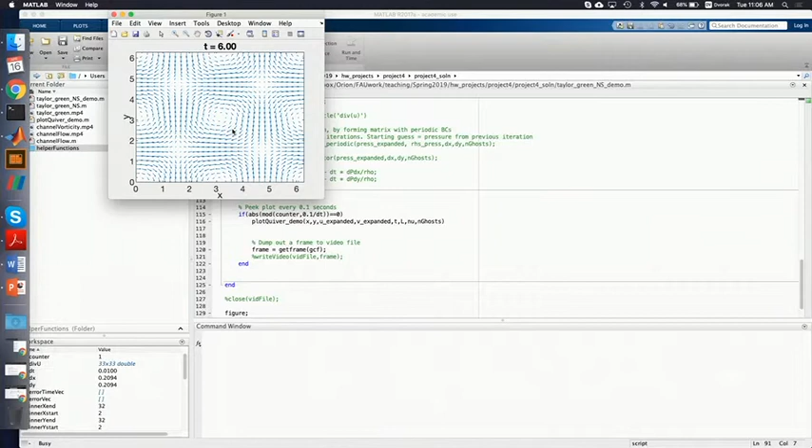Second check is you do only diffusion. So you run the whole code doing only diffusion, no pressure projection, no advection. So yeah, advection commented out, pressure projection commented out. And then what will happen is your velocity vectors will just decay, right? The third check is with this diffusion only simulation, your divergence should stay 0 for all the time steps. Okay.

Now, when we start doing advection also, this statement will no longer be true. So now the divergence of u will not be 0 anymore. So let's see when we plot this. All right, so now div u is no longer 1e minus 15. Okay, and we expect that because the advection term introduces this non-zero divergence.

And the pressure projection is what will correct it. Oh, by the way, let's see what happens to the velocity vector if we let it run without the pressure correction. This is another simple test. So let's see. All right, the velocity field gets messed up, does not look like a Taylor Green vortex anymore. Okay, let's bring back the pressure correction.

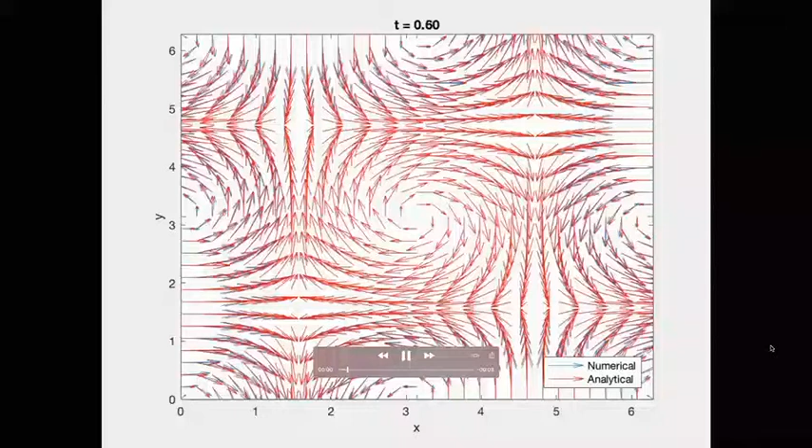And now the code will be much slower because we have to solve the Poisson's equation. All right, and there. So it's much slower, but it retains its Taylor Green vortex characteristic. And again, it will decay, and you have the analytical solution to compare to whether your solution is correct or not. And the full solution actually looks like this. So here I'm comparing numerical answer to the analytical answer. And you can see some difference, but overall, very good match. Okay, so those are the steps you can follow to check each part of your code.

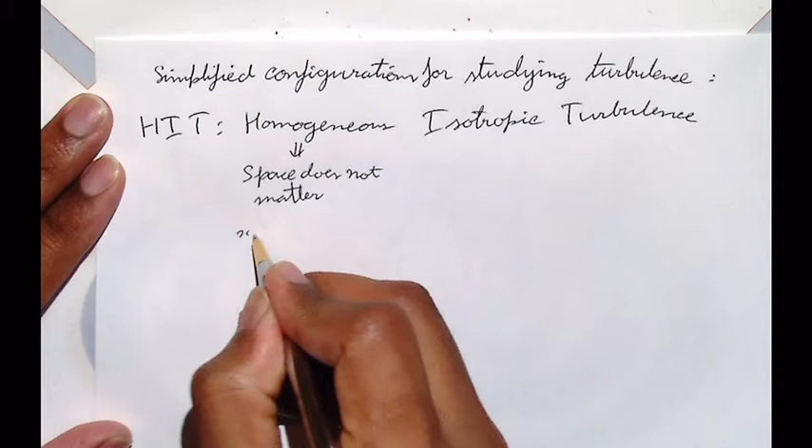So this means space does not matter - if we go from x1 to x2, the statistics will not change, right? Isotropic means direction does not matter, which means whether we look at statistics in x, y, or z, we expect them to be the same. So everything is radially symmetric. So this is the simplest configuration, and we have a 3D periodic box of turbulence.

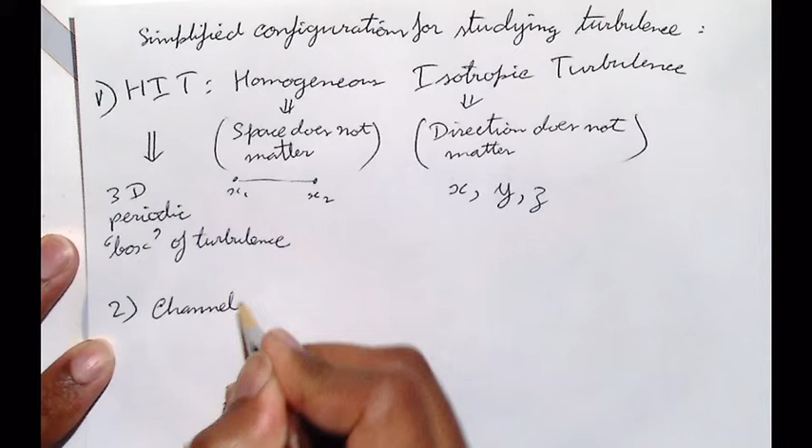Okay, and this is the simplest one. All right, the next level of complexity is the channel flow, which is what I was showing you - the flat plate with flow over it. The advantage of this is you have two walls, and the walls are responsible for creating the turbulence. So this gives you a physical mechanism for creating turbulence. So the advantage is a physical mechanism, which is the wall, generating turbulence.

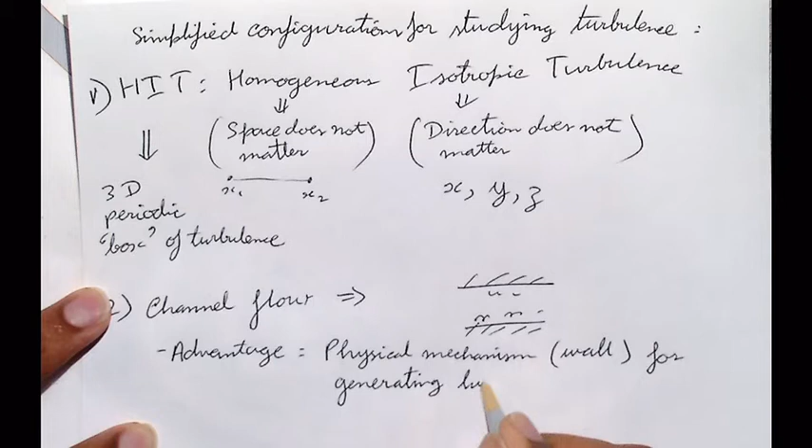What's the disadvantage? Disadvantage compared to the periodic box case - can you think of any disadvantages?

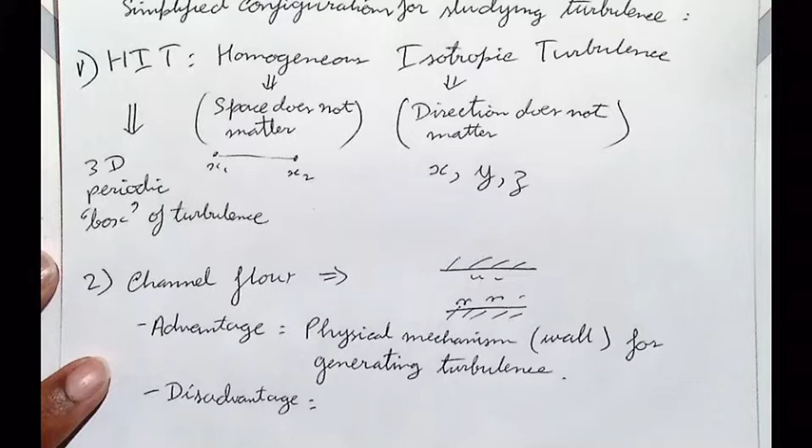Think computationally, think coding. A 3D periodic box is very, very simple to code, right? There's no boundary conditions, nothing complicated going on.

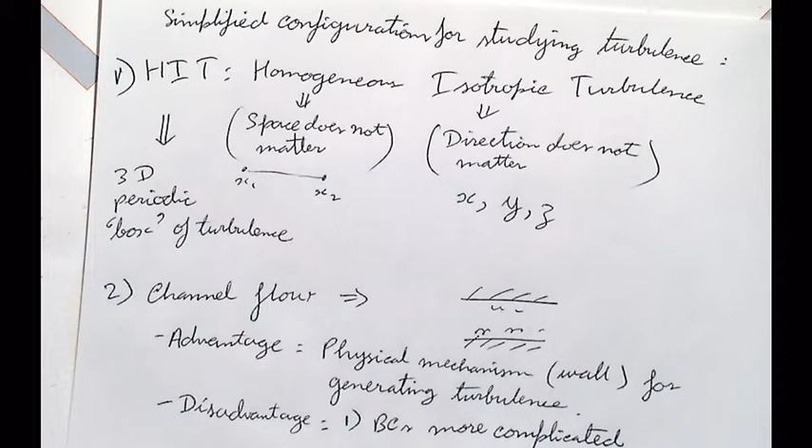With this, now you have to take care of what happens at the walls. So boundary conditions are more complicated. And another disadvantage is the small scales close to the wall are very important, so you have to resolve these small scales. In the 3D periodic box, you don't care, there's no wall where you have to put down more grid points. So this can be computationally more expensive.

This is called, in the channel flow, temporally developing turbulence. Which means that you might start with an initial nice laminar flow, and slowly it will get turbulent.

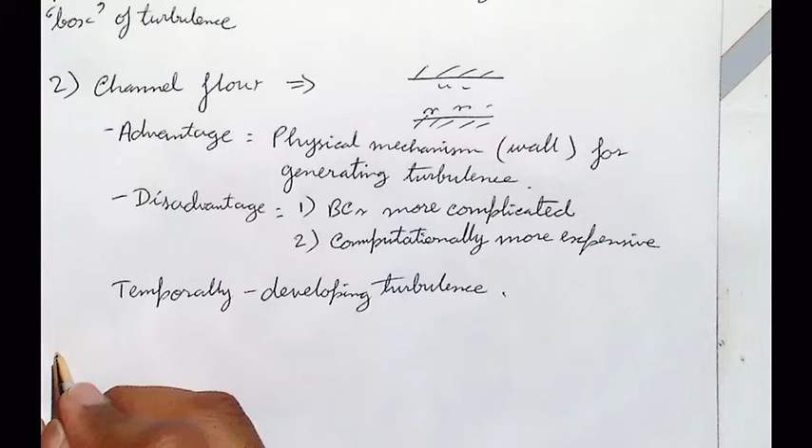Another configuration is the boundary layer flow. In the channel we have two walls, and in between there's flow. With the boundary layer we have a single wall, and there's flow over it. Slowly the boundary layer will develop and become turbulent.

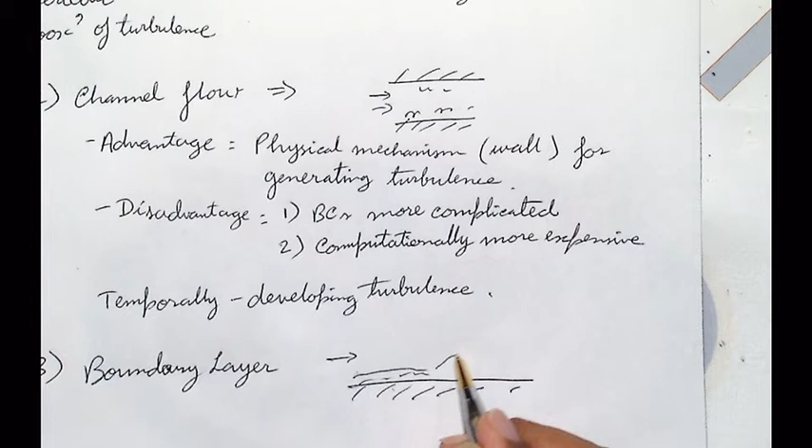And this is spatially developing turbulence. That's because in our simulation we just have the wall and the incoming flow is uniform, or you might impose some turbulent conditions. And slowly, as we go along X, we see the boundary layer becomes turbulent.

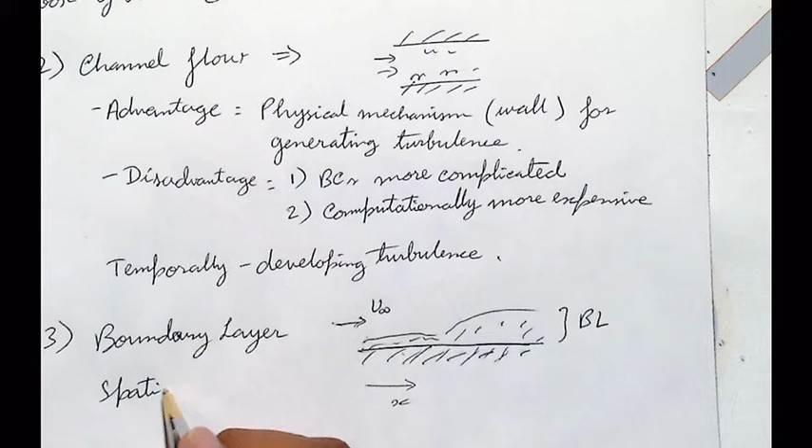And the advantage is, this is the closest configuration to real external flows, right? So this is the internal flow inside a pipe, for instance, an air conditioning duct. And this is what you would get when you're looking at flow over a car.

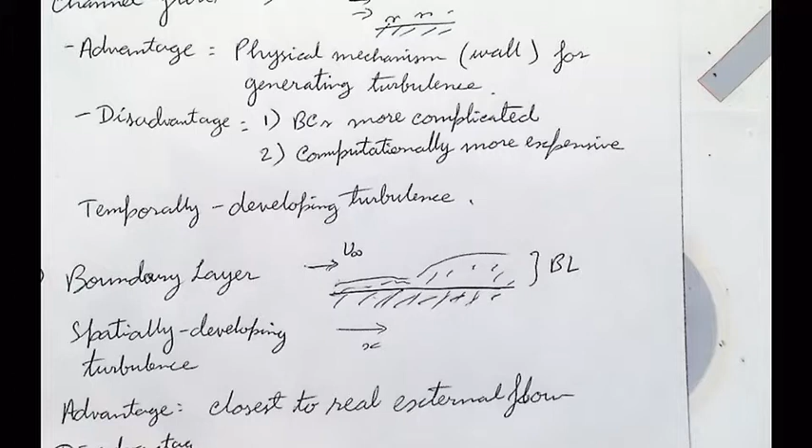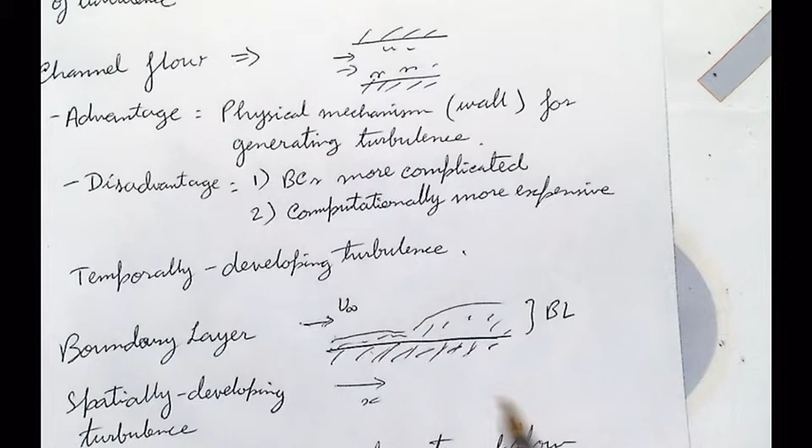And the disadvantage, what is the disadvantage? Think about it, okay, here we have periodic flow, whatever goes out comes back in, so I can technically have a small domain. What happens here? There's no coming back, right? So if you want to look at a large Reynolds number, Re_x, you have to have a very long domain. Make sense? So this configuration tends to be the most expensive.

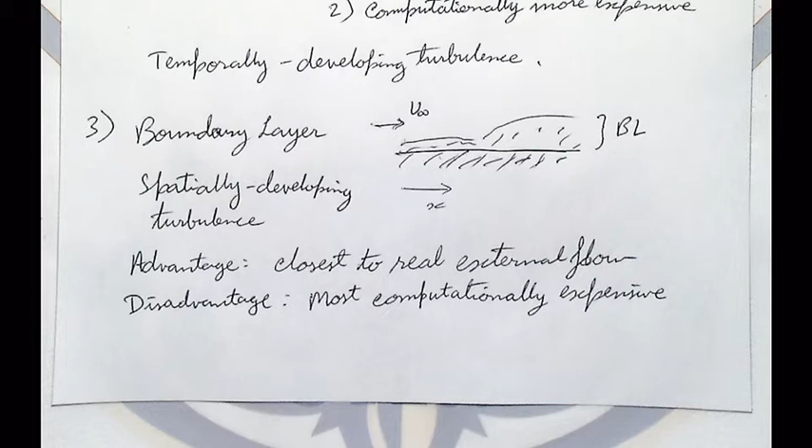So these are three major turbulent flow configurations that people use to study what's happening at the very small scales, in simulations at least, and in experiments. And the goal is to try and understand what's happening physically, so you can postulate models that might work.

Models. What do these models do? Let's think about that for a second. Do you remember what is the problem in turbulence? Why can we not simulate high Reynolds numbers?

If I say simulate something at Reynolds number 1 million, what would you say? I would say I need a turbulence model. Why do you need a turbulence model? Because it was chaotic, so the source of that fluctuation cannot be predicted at high Reynolds number.

It cannot be predicted, but it can be simulated, right? Yes, we are solving the conservation laws exactly. We are simulating them. So technically, you could just simulate it. Let's solve it numerically. That's what I'm asking.

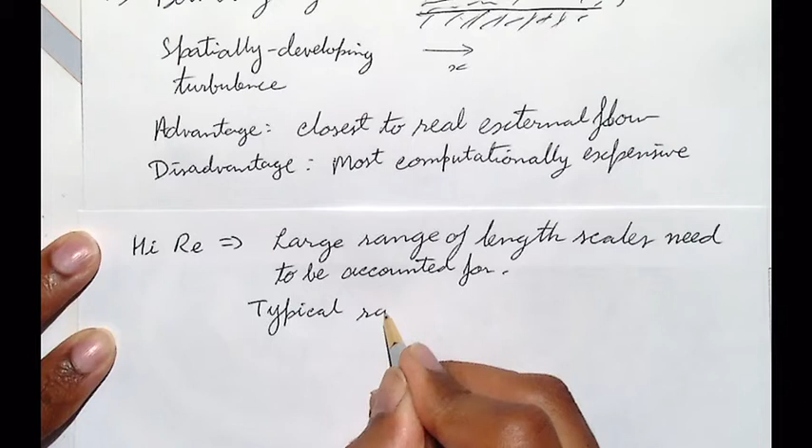These need to be accounted for. The typical range can be from 10 to the 6 to 10 to the 8, in a moderate Reynolds number. What does this mean, 10 to the 6? It just means the largest eddies are of size, let's say 1 kilometer. And as they break down and start dissipating, the smallest eddy size might be 1 millimeter, right?

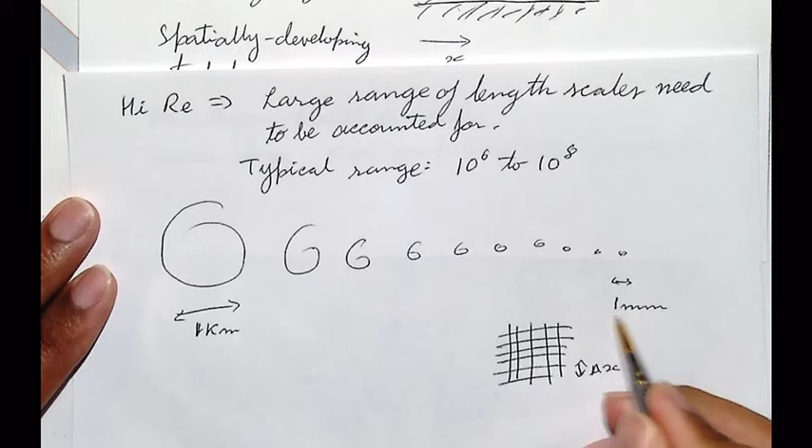So that's 10 to the 6th order of magnitude separation. And our grid scales, when we discretize the domain, delta x and delta y have to be small enough to resolve this 1 millimeter. It's the same problem we see in experiments. There's no way to have enough points to resolve everything that is 1 millimeter small, and do that for 1 kilometer by 1 kilometer by 1 kilometer. So resolving the small scales is the biggest issue.

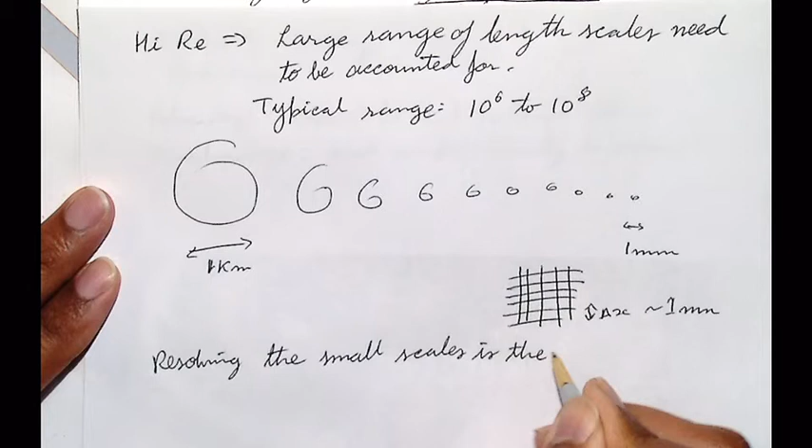Now let's talk about the spectrum. Let's see where it'll be clear how exactly this is relevant. So energy spectrum, E of kappa and kappa. In turbulent flows, the E energy spectrum looks somewhat like this. Do you remember what kappa is? How is kappa related to these eddies I'm showing here?

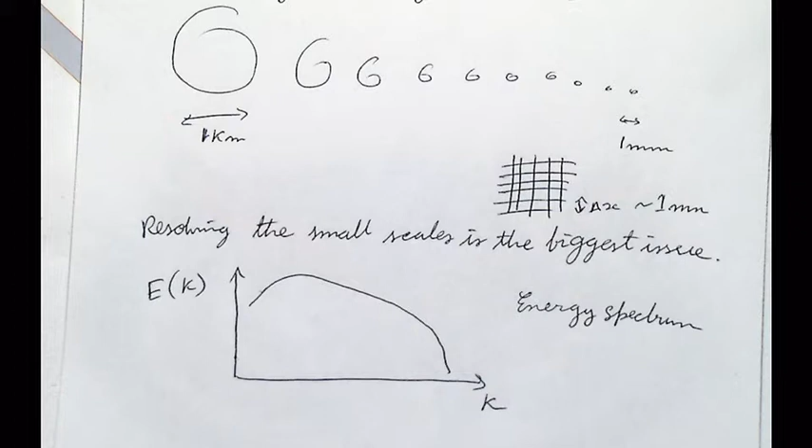Think in terms of the wavelength, wavelength in space. Kappa is, let's say, 1 by lambda, right? Or 2 pi by lambda, whichever one you prefer. And what would you say the wavelength of this eddy is?

I'm using the term wavelength loosely. What's the periodic length of this eddy? 1 kilometer, and this is 1 millimeter. So where would this go on the energy spectrum? To the right or to the left?

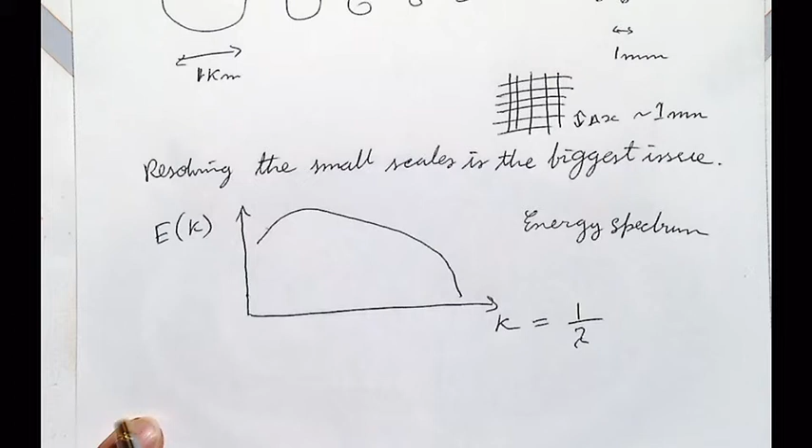To the left. So the large scales go to low wave numbers. These are the large eddies, and these are the small scales. Make sense? High wave number corresponds to the smallest eddies.

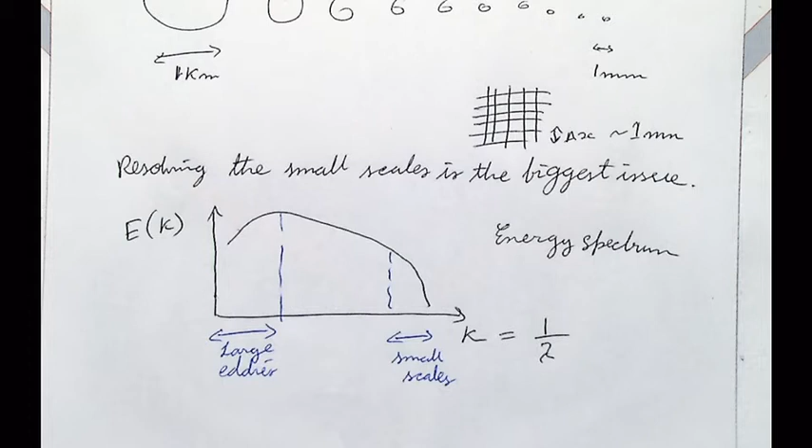So what this picture is telling us is the energy contained. This is actually equivalent to looking at kinetic energy. So this is high kinetic energy, low kinetic energy. The energy contained in large eddies is high, and what happens slowly is these large eddies start disintegrating, and there's an inviscid cascade.

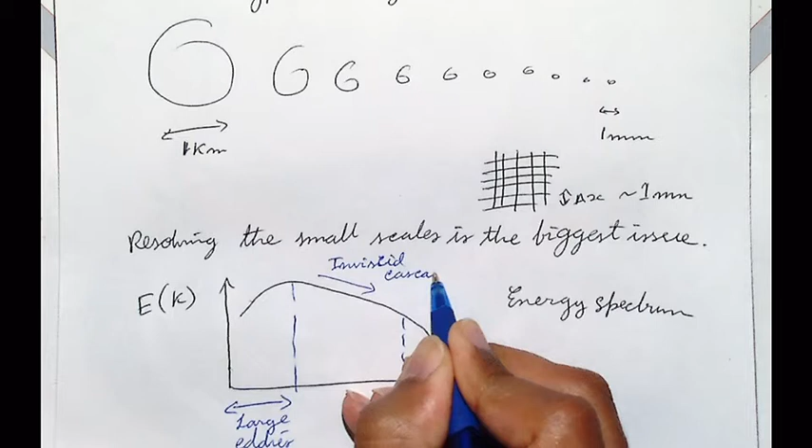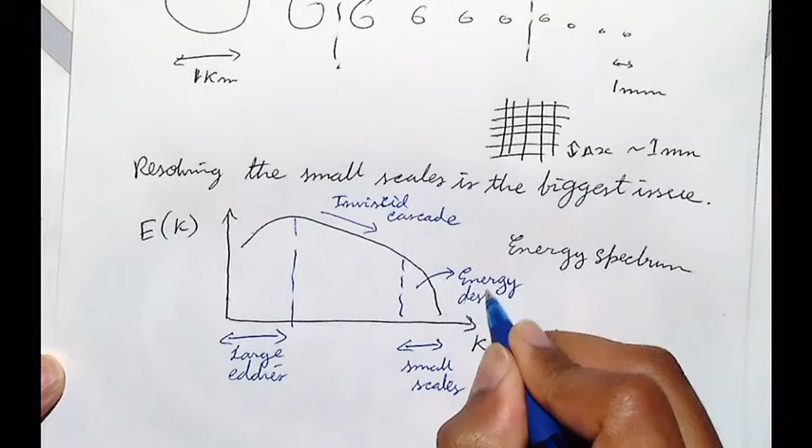And that's what we were talking about earlier. So there's an inviscid cascade, up until the eddies become small enough that you can start dissipating. So energy is destroyed at these scales due to viscosity, and energy is injected into the flow here.

Does all this make sense? Something is confusing, how do you define E? Ek, you can just say, is the Fourier transform of half u squared. That's why it's called the energy spectrum, kinetic energy spectrum. So it's basically the kinetic energy.

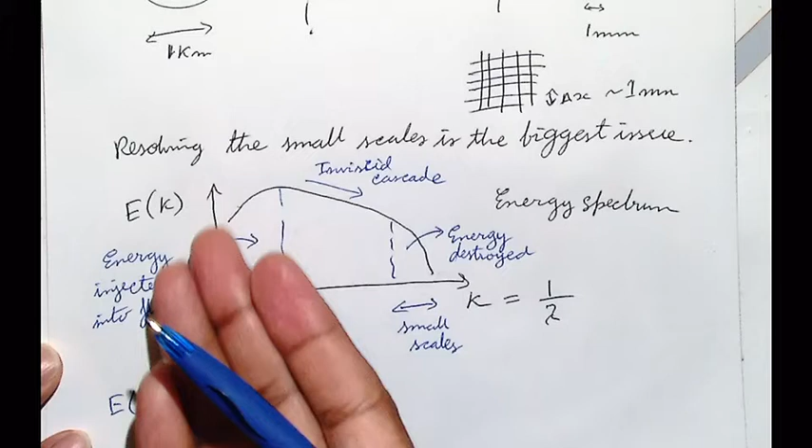Anything else? All right, now we were talking about this typical range being 10 to the 6 to 10 to the 8. We cannot resolve all the length scales. So in terms of this spectrum, what does that mean? Up to what point can I resolve and what is unresolved?

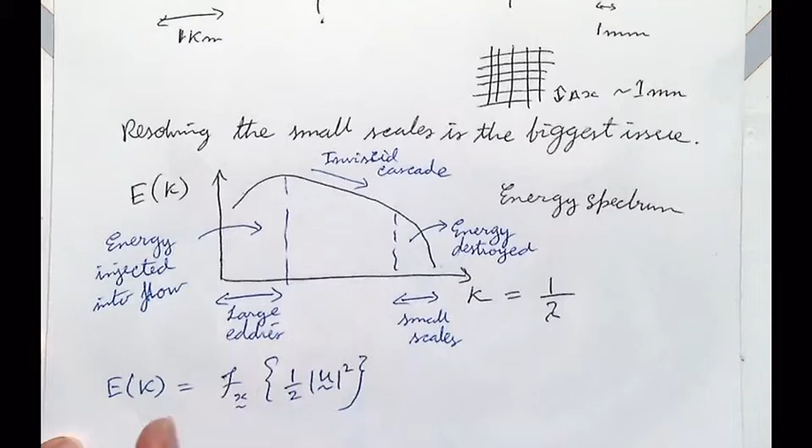You know, almost always the large scales are very important to us. This might be a hurricane we want to track. This might be the large flow features on a car or airplane that we care about. So which half, left half or right half of the spectrum, must we resolve?

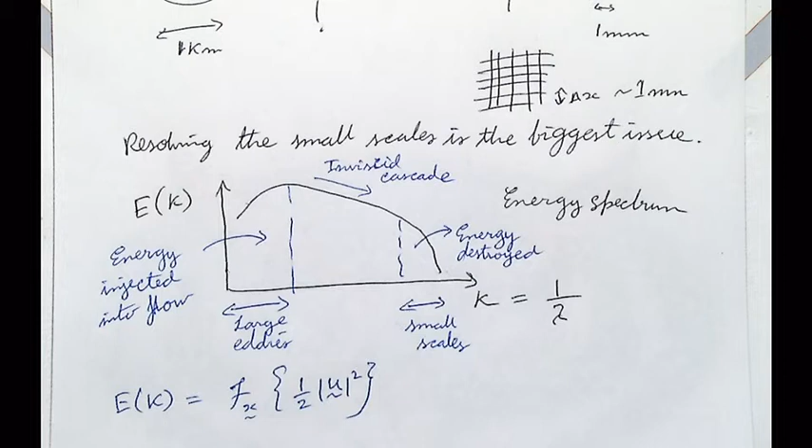It's of physical interest to us. Left. Yeah, so the left half, right? So everything from the large scale up to a certain point. And that certain point is dictated by how much computational power you have available to you. If you have a huge supercomputer and you can do very small delta x's, potentially you could resolve all the way over here.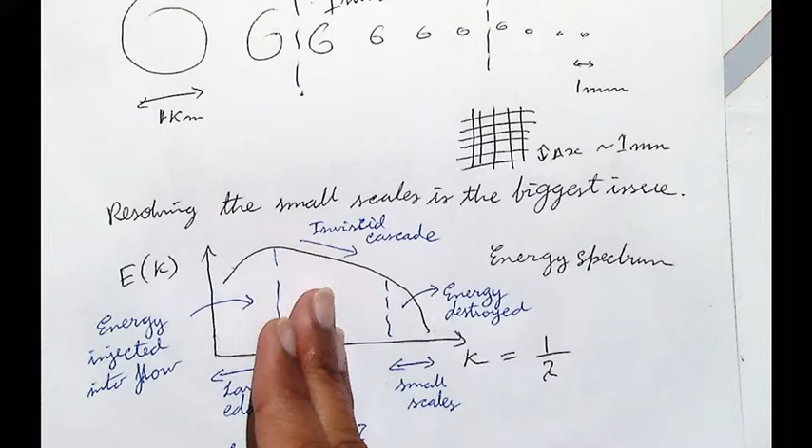But for real cases, that's not the case. We are stuck to somewhere over here, even for the simple configuration we were talking about earlier, the wall-bounded channel flow or the boundary layer. So what the spectrum looks like in these turbulence modeling simulations is, you have something like this, and then what happens? By the way, before we go on, this is called a DNS.

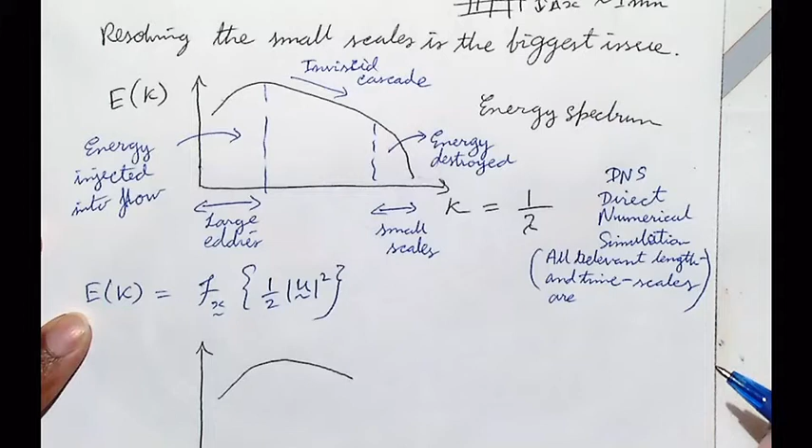DNS is a direct numerical simulation. And the only thing that this means is all relevant length and time scales are what? Are absent from the simulation, or what does DNS mean? Are included. Yeah, they're included, they're accounted for by the simulation. That's it, that's the only thing DNS means.

Excuse me, why does this curve start like a parabolic shape? Where? Why not linear? Here, on the far left, it's going up and then down. Why is it going up and down?

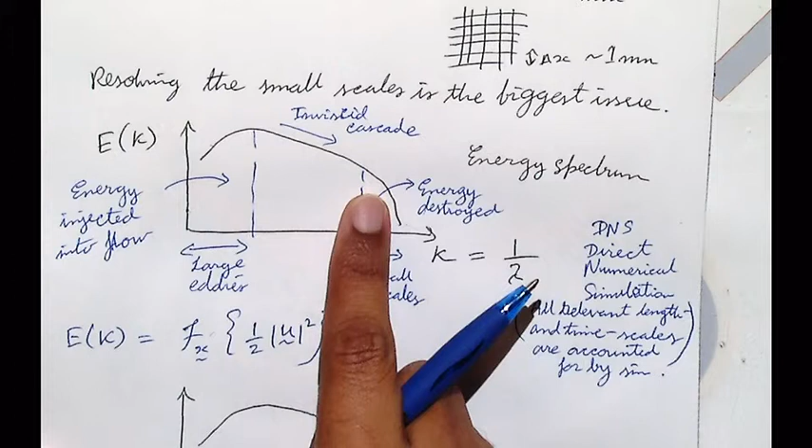Yes, so again, think about a car for instance. When you drive, you are injecting energy into the flow at the length scale of the car. So you're injecting energy here, that's all you're doing. But what happens to that energy? The flow does not disappear immediately. These large eddies will start breaking down, and the energy starts decreasing slowly. There's no energy destroyed over here, up until when the eddies are small enough that viscous dissipation destroys the energy. That's why you first go up and down.

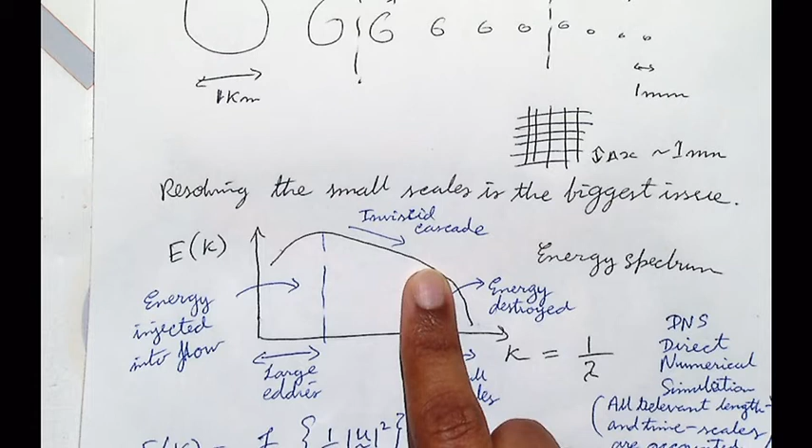Yeah, I understand what you're saying, but physically, for example in a wake, where is that start point, that injection? Where does that correspond to, who is creating the wake? A cylinder is creating the wake. So this length scale would correspond to the diameter of the cylinder, for instance. Make sense? Yes, okay.

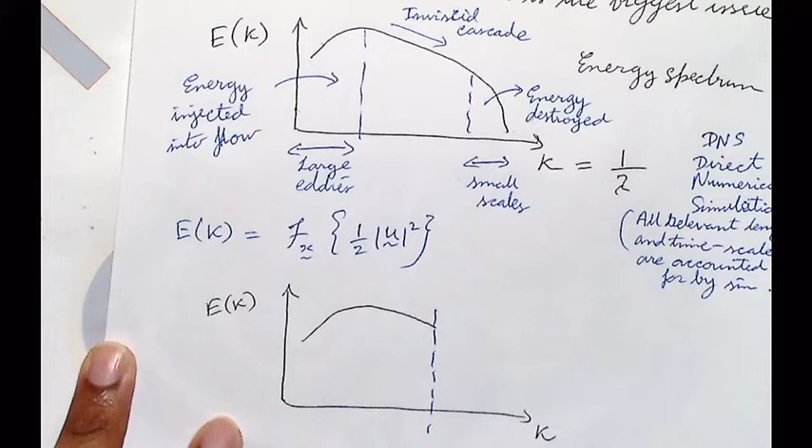In the end? All right, so okay, in a turbulence model simulation, what will the spectrum look like? Yeah, it would drop at this last wave number, the highest wave number. Where should I put the highest wave number? Should I put that here? Yeah, it will depend on what all scales I'm trying to resolve. Okay, and why will it drop? Because there are no such scales there, so there won't be any energy associated with them.

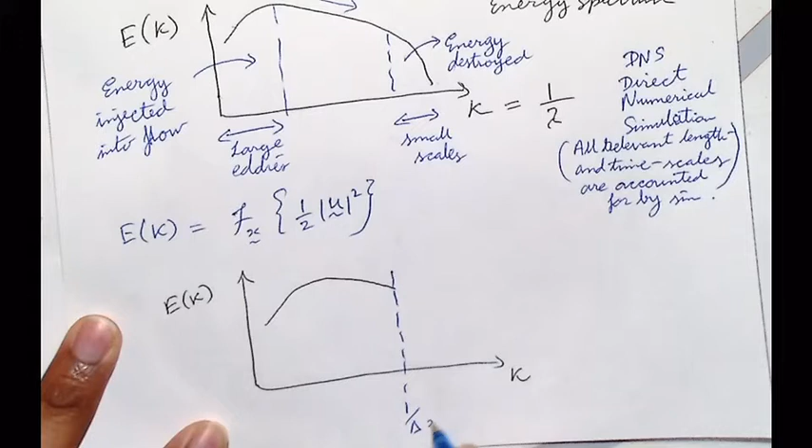Well, it will not drop. I mean, think about the delta x. So this is, let's say it's 1 by delta x, right? And this is your grid size. You can compute energy for this length scale, but smaller than that does not exist in your simulation. So all of this is unknown. And this is exactly what these turbulence models do, so this has to be modeled. And this is called resolved. Okay? And the important thing is, if you don't do anything, if you just say my grid is 1 delta x, I don't care, let me just run the simulation and see what happens. What will happen? And remember, your cylinder is injecting energy continuously.

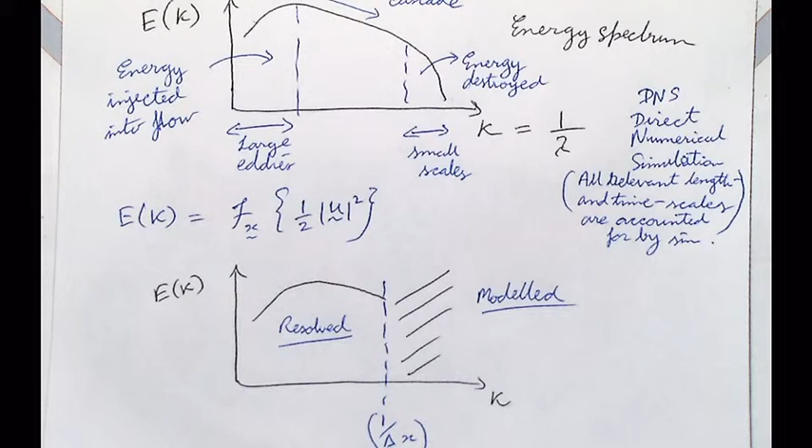We talked about this being an inviscid cascade, so there's no destruction of energy. If I remove the energy destroying scales, what will happen to the simulation? This is like a single time snapshot, where I compute the energy at all the scales at a single time. So as time passes, what will happen to the curve?

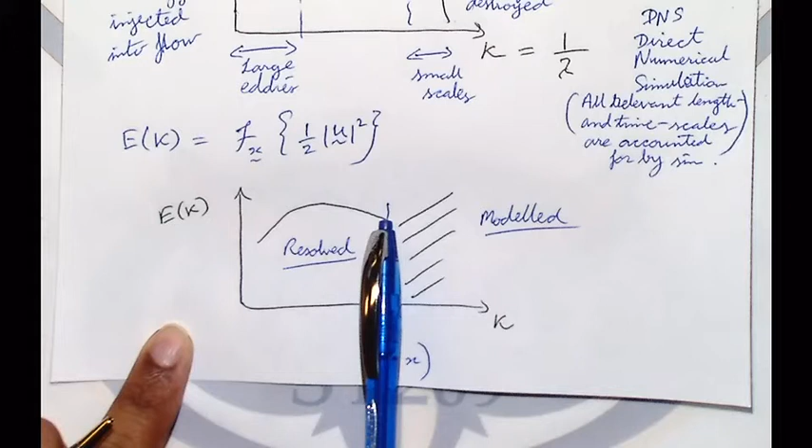What happens is you keep injecting energy at this scale. It keeps flowing down to the smallest resolved scale, and then it has nowhere to go. There's no mechanism for dissipation, so the energy will keep piling up over here, and then your simulation will go unstable.

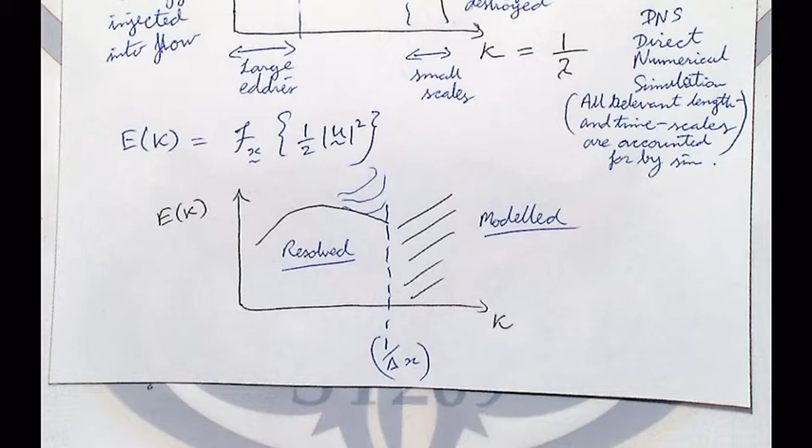That's the issue with turbulence simulation. This is what turbulence modeling tries to resolve. Is this clear conceptually? Okay, that's it conceptually, but you can spend multiple lifetimes going through the literature people have published on these things. So we need some way of dissipating this energy. What would you do?

Think about the Navier-Stokes equations. How can we change the momentum equation to do something about this pileup? Adding a term, like a loss term or kappa, adding like a diffusion term. Yeah, it can be diffusion, something that destroys energy. So that's exactly what turbulence models try to do.

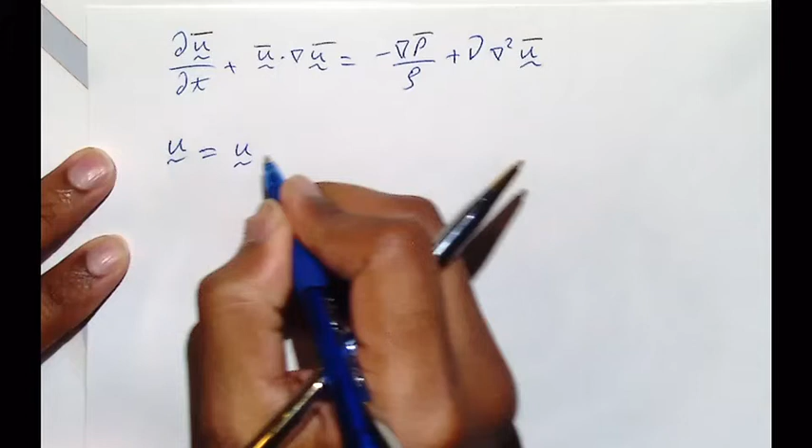So let me write down the Navier-Stokes equations. This is the normal Navier-Stokes, but what we are doing now is we are not solving for the true velocity. We are solving for the filtered quantities. What does this mean? It just means the real u is equal to the filtered u plus the fluctuation.

So this is called the fluctuating velocity. The actual term is called sub-grid scale velocity, or SGS. And this is the filtered velocity. What do we mean by filtered velocity?

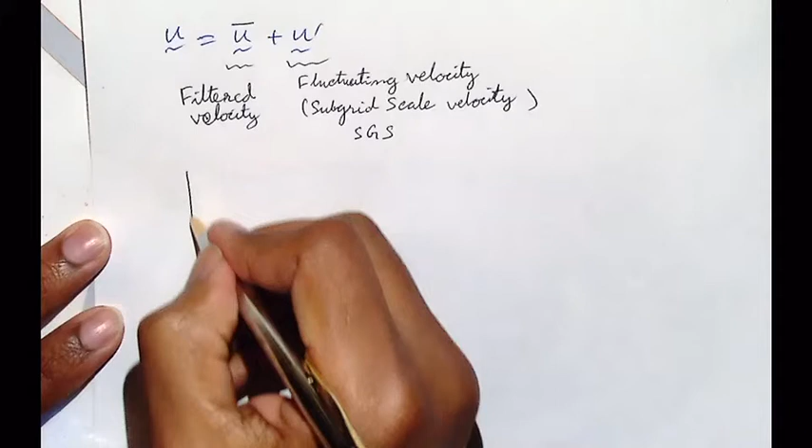In reality, if I have a highly turbulent flow, the velocity would look like that. What does U bar look like? Just intuitively, what would it look like? Flat, you want to average out everything. Yeah, so you can do that.

Say, okay, this is my U bar. This is called averaging, basically. Or you can do something less drastic.

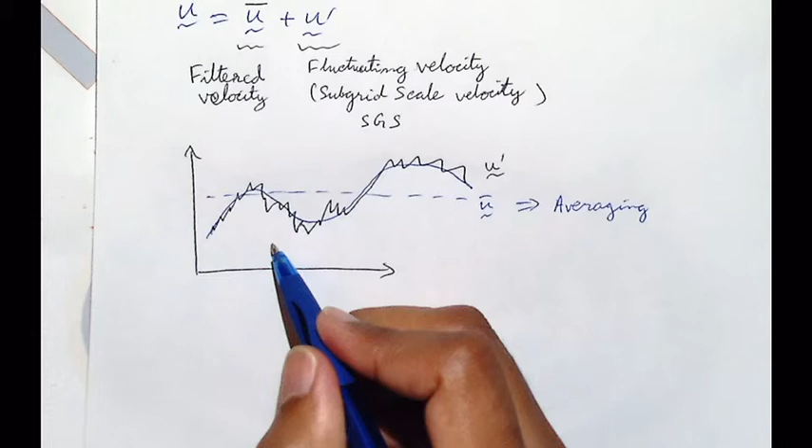Think about the delta x we need to represent the blue curve versus the black curve. If we don't have very small delta x, all these high frequency fluctuations will be lost. But if we say we only care about the filtered velocity field, the blue curve can be represented with much larger delta x's. Make sense?

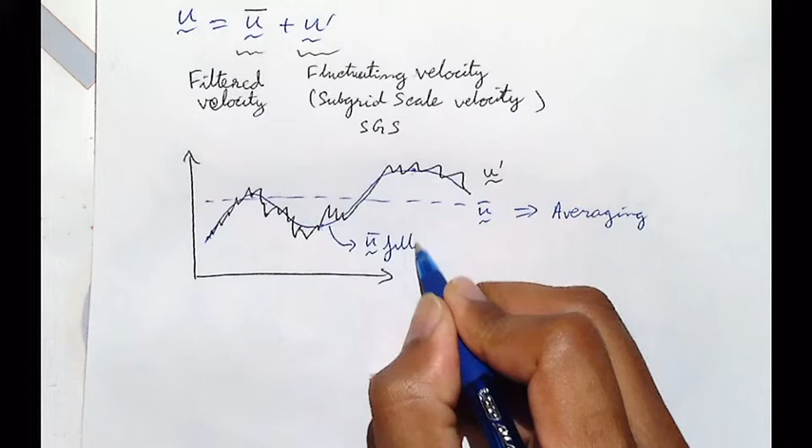This is the argument people put forward, that not resolving everything is equivalent, mathematically equivalent, to doing a filtering operation. Something is not clear? Looks clear. All right, clear, okay.

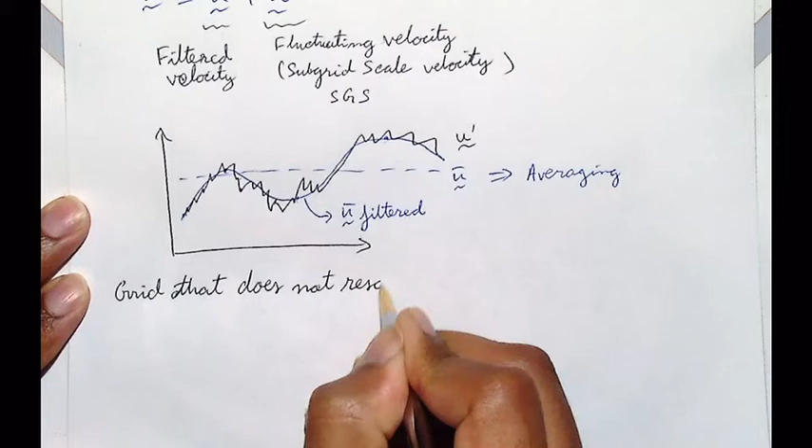A grid that does not resolve the small scale fluctuation, it acts as an implicit filter. And there's a lot of controversy on what exactly is the mathematical representation of this implicit filter, regarding how to represent this implicit filter mathematically.

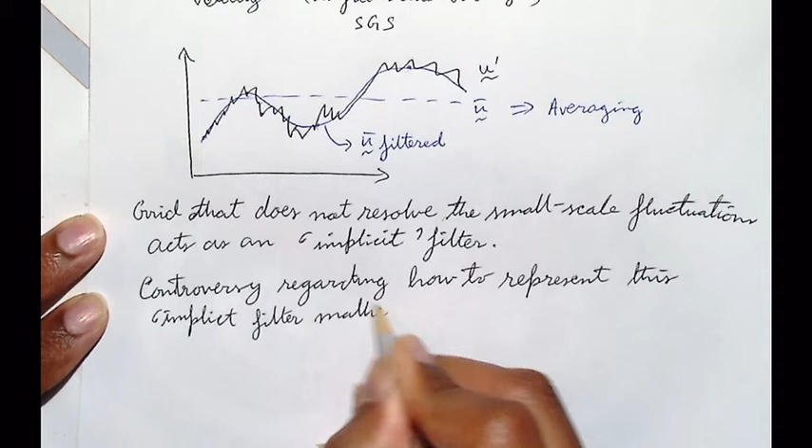Let me point out this: what we have written here is still incomplete, so we will come back to it and see what's missing. All right, so there's a lot of controversy about this.

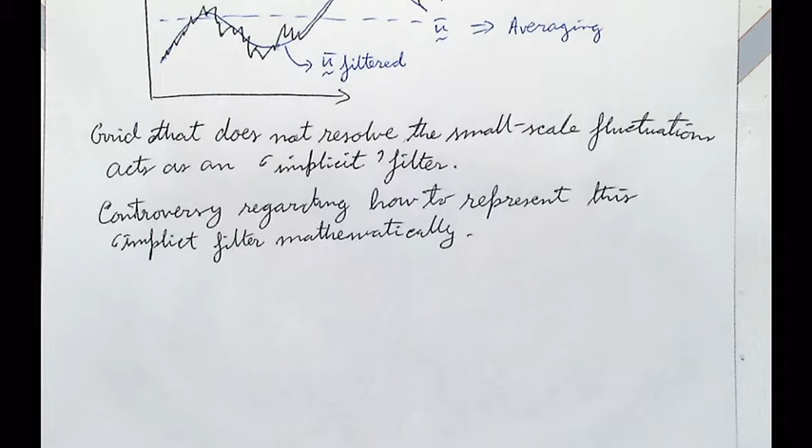I say I will not resolve all the scales. What exactly does this mean? Are you familiar with explicit filters? Have you heard of the Gaussian filter? Do you know what this one is? Gaussian filter. So there's several types of filters: Gaussian filter, box filter, these are the three main and simplest ones, and there's one called sharp spectral filter.

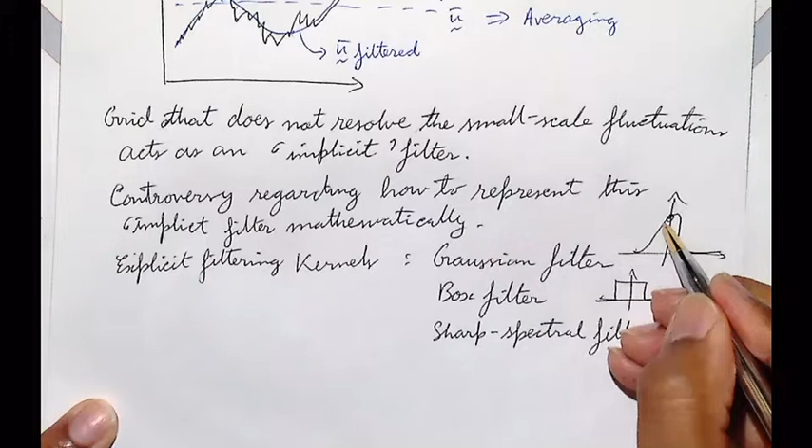The box filter basically looks like a box, and you do averaging. You sum up your 4 neighboring points, compute the average, and store that at your node. That's a box filter. Gaussian filter does the same, but with a Gaussian kernel. You take your own value, multiply it by, say, 0.5, take your neighbor, multiply it by 0.4, sum it up and store at your own location. What this operation basically does is smooth out the field. So if we look at, let me see, perfect.

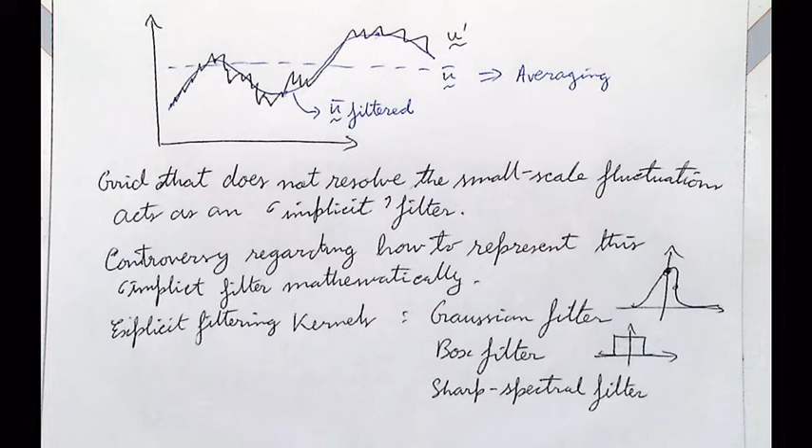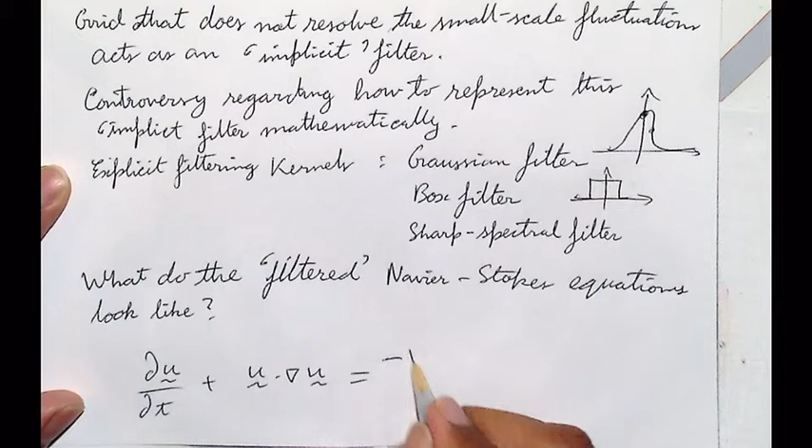Okay, so this was incomplete. Let's make this complete now. The main question is, what do the filtered Navier-Stokes equations look like? For that, what we do is we just take the momentum equation and apply the filtering operation to the whole thing.

In practice, what you would do is, if you have DNS data, you would take it and convolve it with these Gaussian filter, box filter, or sharp spectral filter. And okay, what's the result? This bar, can I take it inside here? This bar, what can I do? Can I take this inside to each of them? Let me change this to nabla form, right? So it's nabla dot uu.

This is because this is equal to u nabla dot u plus u dot nabla u, and this we know is zero, right? So these two are equivalent. U dot nabla u is the same as this, so I've just changed this to this. For minus nabla p, we can take this inside, plus nu nabla squared u, we can take this inside. We can take this filtering inside because this is linear in U, but this term is not linear in U. So we cannot just say this is equal to nabla dot u bar u bar.

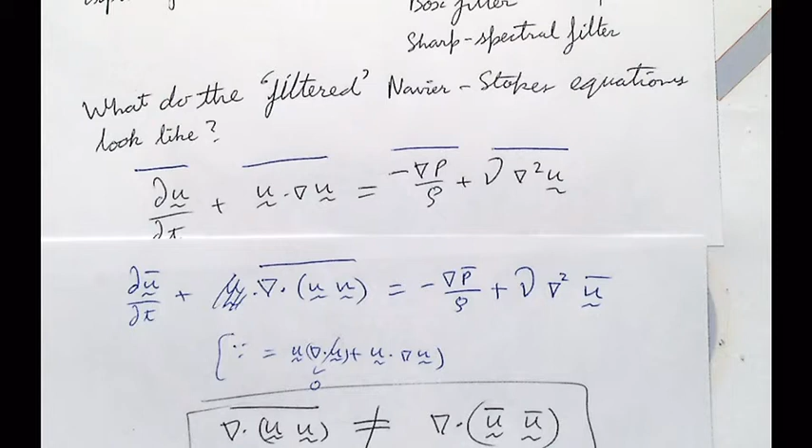Make sense? When filtering, this operation is not valid. This left side is not equivalent to the right side. So, should we be happy with this Navier-Stokes equation? Does this make sense or not? Something missing? Think about when you're solving on your coarse grid, what are you solving? Which of these quantities are you solving for? Are you solving for U or U bar? So we're solving for U... The grid is coarse, yes, so you cannot resolve all the scales. You can only resolve up to some of the scales. So you're actually solving for U bar, right?

The filtered U. If we go back to this figure, okay, you're solving for the blue line, you cannot resolve this. So if you're solving the Navier-Stokes equation without worrying about turbulence modeling for the filtered U, what would it look like? It would look something like this: dU bar dt plus nabla dot... Right? So you would solve something that looks like this, correct? But our original Navier-Stokes equation is this. So there's some terms that are missing.

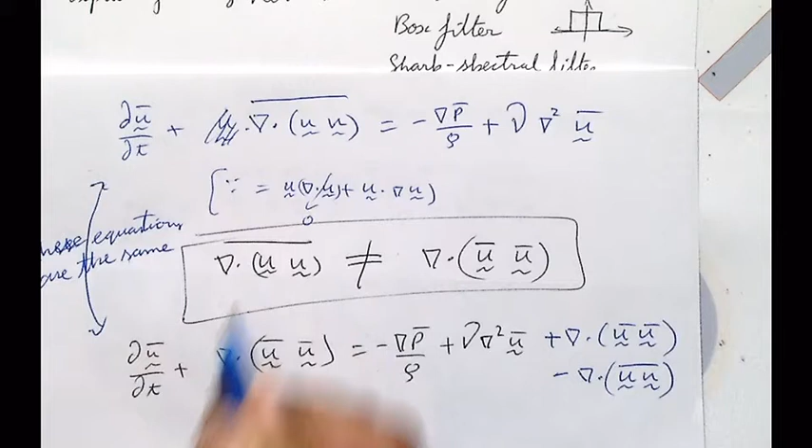So I've added this here, let me add that to the other side, and let me bring that to that side. Now this equation is exactly equal to this equation. Make sense? These equations are the same. So this is the true Navier-Stokes equation, which I'm applying the filter into, and this is what it ends up being. Again, cancel this, take this to the left, you recover that to the left. So when you solve your equation, you're solving for this, and this is the term that is missing.

This is called the subgrid stress. So this term, people usually write it as a minus: minus u u bar, minus u bar u bar. This is called the subgrid stress, tau SGS. And this is the term that has to be modeled.

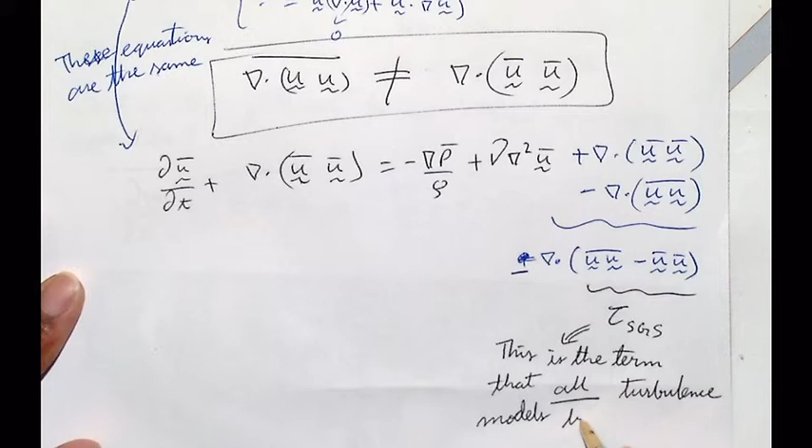All turbulence models, no matter which one, try to account for that. Is this clear? This is what turbulence models do. There's a missing term in the filtered Navier-Stokes, which they try to recreate. And the problem is, in your simulation, you might have u bar. This term is present, but this term is absent because this involves the full u.

Clear? All right, so some models try to do this. First, we go from DNS to LES to RANS. DNS we already know is direct numerical simulation, no model required. LES is large eddy simulation, which means that if you look at the spectrum, you resolve up to some large eddy, and we have a cutoff, and all of this needs to be modeled. RANS means Reynolds Averaged Navier-Stokes. You might have heard of RANS quite a bit. Most industrial work tends to use this RANS. Why?

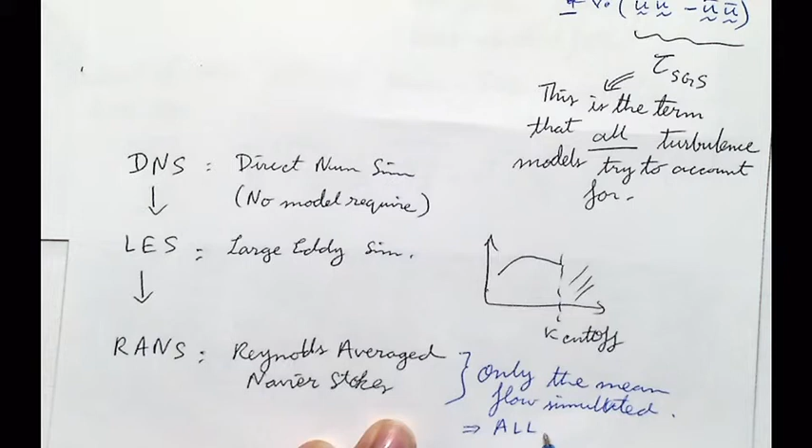Only the mean flow is simulated, which is equivalent to saying all the length scales, all the small length scales, are modeled. Here you were actually resolving up to some small scales, but now you said, nah, I don't care about anything. Let me get rid of everything, I only care about the average flow.

So why does industry prefer this? Think about it, computationally: here you have to resolve some things, you need heavy computation. Here, you're just solving for the mean flow, solving for one wave number, kappa equals 0. So you can do that simulation of an airplane on this laptop in a few minutes, right?

So that is the point when CFD starts becoming colorful fluid dynamics. University research almost never uses RANS. Industry has to rely on it because we haven't given them a good turbulence model yet. So these things are used a lot, but you should always be skeptical of how accurate the results are.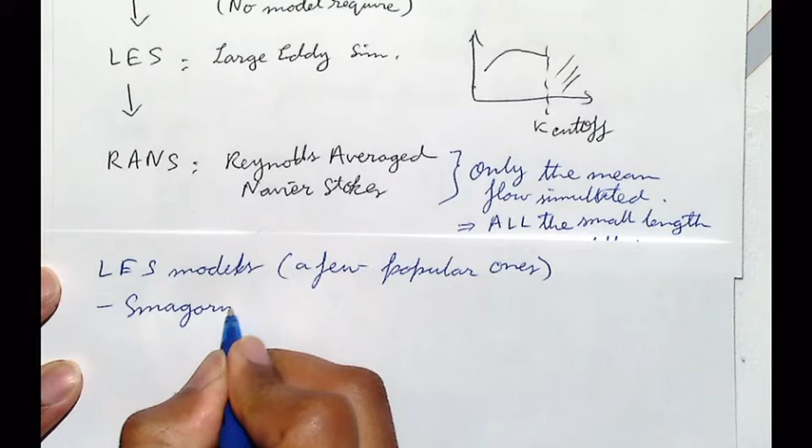Do you know some of the model names? Okay, let's start with some LES models, a few of them, right? I heard Smagorinsky. Do you know what the Smagorinsky model does? This was created in 1967, I think, 60s for sure.

Do you know what it does? You said Smagorinsky, so do you know what it does? Based on some length scale you are giving in the simulations, students. Physically, what does it try to do? Okay, I know mathematics. No? Alright, so think about what happens here.

You said we should introduce some dissipation here, right? So Smagorinsky model does exactly that. It says this unknown term will look like a viscous term. So this says tau SGS will look like minus 2 mu SGS S, and this is basically half of nabla U filtered plus nabla U filtered transpose. Make sense? So this is just saying, alright, I have my physical diffusion. Let me pretend this additional term also acts like a diffusion. So that's the term I will use.

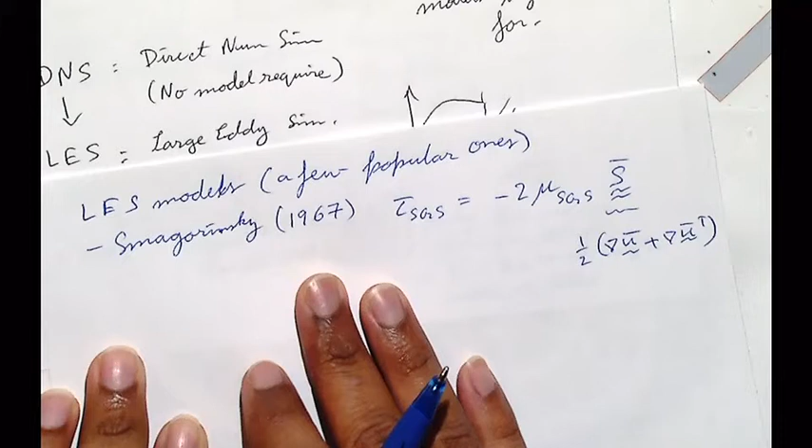And this is a very popular, still used LES model, although there have been numerous papers showing that this is not the best way to go. Again, people have to use these because there's nothing better that exists. So here the unknown is this, right? This is a constant model coefficient. How do you determine this?

How do you say, for my simulation, mu is equal to blah, blah, blah? Probably according to the volume, or you're giving the cell size, or something depending on the cell size. I don't know, but you're already more sophisticated than what they did. They said we will fit experimental or DNS data to figure out what this mu is.

And then the mu was a constant between 0.1 and 0.24 or 0.25. People keep tuning the value until they get the result they want. How do they know what result they want? Because there's a DNS that exists. So if you try to do something that doesn't exist, you don't know what mu should be. That's the biggest problem in turbulence modeling. It's not predictive. Anybody that tells you otherwise, again, be skeptical.

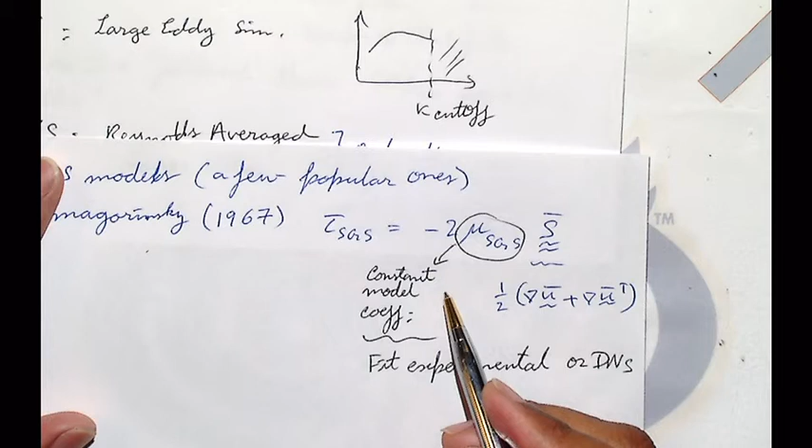Any other question? I'm comparing this with the viscosity of a fluid, for example. That is property of a fluid. What in this case is a property of a model? This is the property of your model, and this should depend on how much energy is piling up here that you need to cut off. So when you change the flow conditions, you will have to change mu. When you change it from a homogeneous turbulence to a wall-bounded turbulence, you have to use a different mu.

There, mu dissipates too much, so you have to lower the value to 0.1 arbitrarily. And how do you know it dissipates too much? Because you have DNS data to compare to. What if you want to do a simulation for which you cannot do a DNS? You can forget about it. And if we have DNS, why would we do LES? Exactly. So these model coefficients are tuned at very low Reynolds numbers, for which you can do DNS.

So you do a DNS and say, okay, for this low Reynolds number, I have this particular value of mu, and I'm hoping, I'm praying that this remains valid for much higher Reynolds numbers, which never works. Which is why we don't have good turbulence models.

Make sense? All right, so there's the Smagorinsky model, there's the dynamic Smagorinsky, there's the tensor diffusivity model.

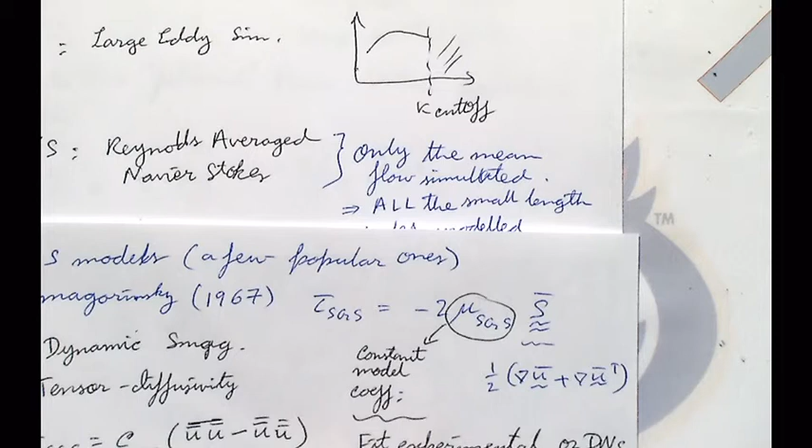This tensor diffusivity model just says tau SGS is equal to, let's say, C SGS times U bar bar, whole thing minus U bar bar. Okay, so this is made to look very close to that term.

But again, there's an assumption. We replace this true velocity with the filtered velocity. So again, there's no good way to do this. And there's RANS models, and again, there's many, many more.

Some RANS models that you might have heard of are K epsilon model, K omega model, Spalart-Allmaras model. What was one more? We have SST, RNG. Yeah, there's SST omega, RNG, SST K omega, etc., etc., etc.

What do all these models do? They try to include the influence of this term in the filtered Navier-Stokes equations by fitting data to experiments, or keep modifying the models, keep tuning them until you get the result that you expect. If you already have the result you expect, you don't need to do simulations, right? So that's the state of turbulence modeling today.

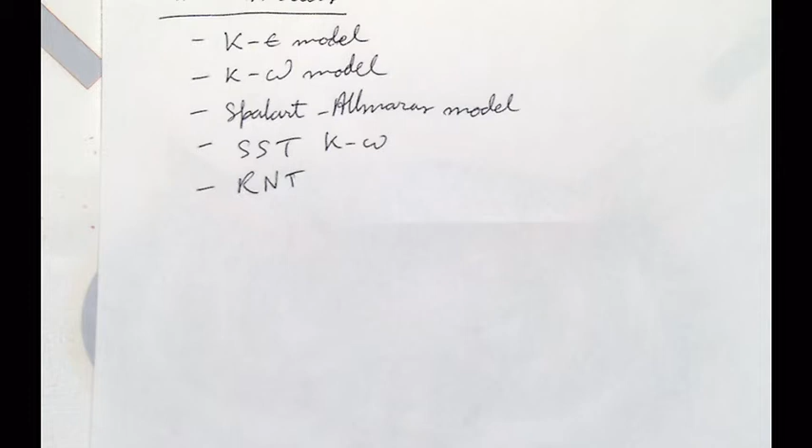Questions? And people are still trying. They have been trying for 60 years. So I will put in some final remarks, and yeah, these topics still generate a lot of fighting at conferences, and actually I've heard people shouting at each other. I've seen them shouting at each other.

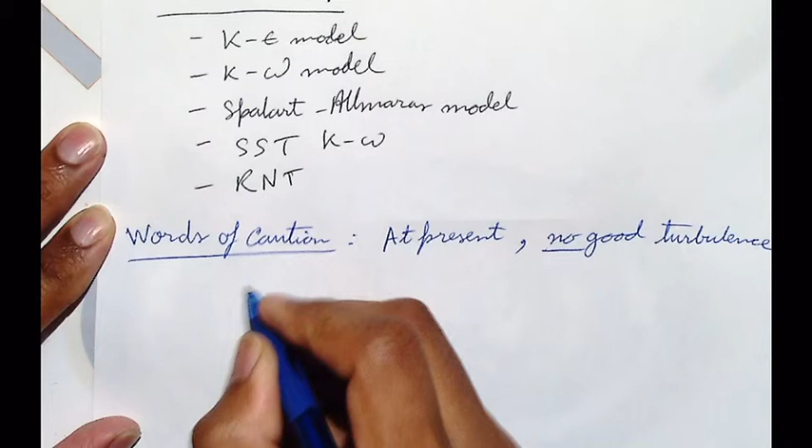Words of caution. At present, no good turbulence model exists that can be applied to general flow configurations.

So anytime you use LES or the RANS models, what should you do? You call this approximation? Use different models, check, compare different models. But how do you know which model is correct?

If you already have the answer which you can compare to, then why do the LES or why do the simulation? But experiments can take time, yeah. But you have the experiment at the flow condition you want, right? Why do you want to do more experiments? Because you want to change the Reynolds number, or you want to change the cylinder. In that case, the model coefficient also needs to be changed.

So, no predictive power. Do you get what I'm saying? Yeah, so again, people might yell at me for saying that, but this is the truth. If you talk to a researcher who spent their lifetime in turbulence, they will start screaming, literally. But that's the truth, yeah.

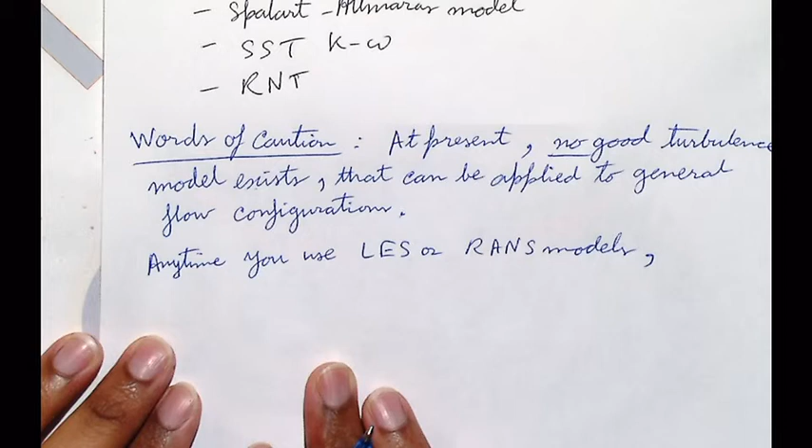There are 10, what, 10 each coefficient nearly for RANS models. So every time you change the coefficient, the simulation changes. Every time you change the coefficient, the results will change. And fine, you can keep changing the coefficient until the results match your expectation. But if you already have an expectation, there's no need for doing a predictive simulation. That's the purpose, right? The simulation predicts something that's correct that we don't know. That's the reason for doing simulations. Make sense? Yep. So again, there are limitations to everything, to experiments, to simulations, to modeling.

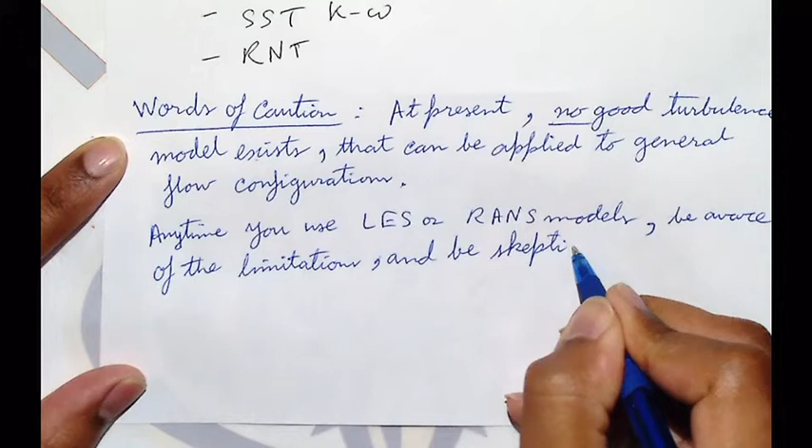Just be aware of that. Okay, anytime you use LES or RANS models, be aware of the limitations. And be skeptical, always.

Question is, let's say we have thousands, millions of papers in the world, right? Some of them, for example, use some turbulence model for some application. Okay, I'll give you some example. For example, it says I use SST K omega model, this was my ship, and it worked, and I compared with the results, and it matches. And some of the paper uses some other turbulence model, and it says, for me, this model didn't work, but I use the same simulation.

Yeah, and that's a very common situation. If you tell 10 different people to use the same model and do the same simulation on the same geometry, they will come up with 10 different results. And there are workshops that do exactly this. There's a big problem given to 10 different research groups, and then they all come together and compare. Nobody matches each other, even if they're using the same thing. So that's why I'm saying be very careful and be very skeptical, always.

If you want my unsolicited advice, never use RANS models. They take more time, they take a lot of your investment, and the return is not good. LES models, again, are expensive, but they give you results closer to the truth than RANS.

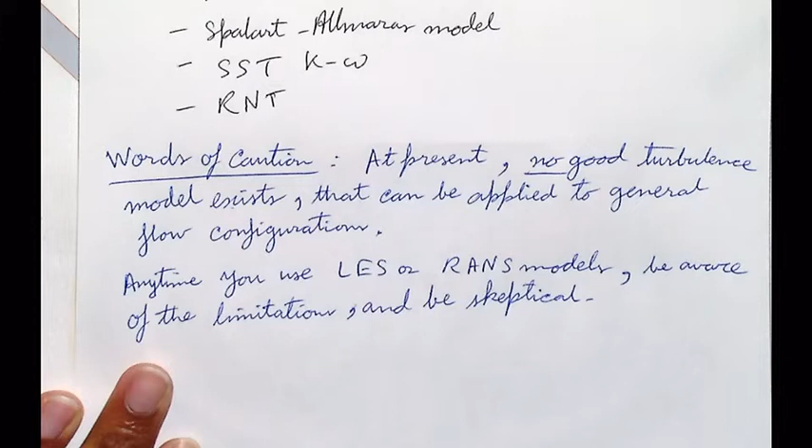RANS is completely easy, it gets rid of everything and just solves for you. But the problem is the industry comes and submits a project, let's say a 30-meter ship, and you can't solve that with LES given limited computer resources. So that's the point: you tell them what can be done and what cannot be done.

If they just want colorful pictures, then generally, yes, if you're talking about industry, they want that. Then why come to scientists? That's not why we're here. I'm questioning that.

So anytime you use these models, be aware of the limitations and be skeptical.

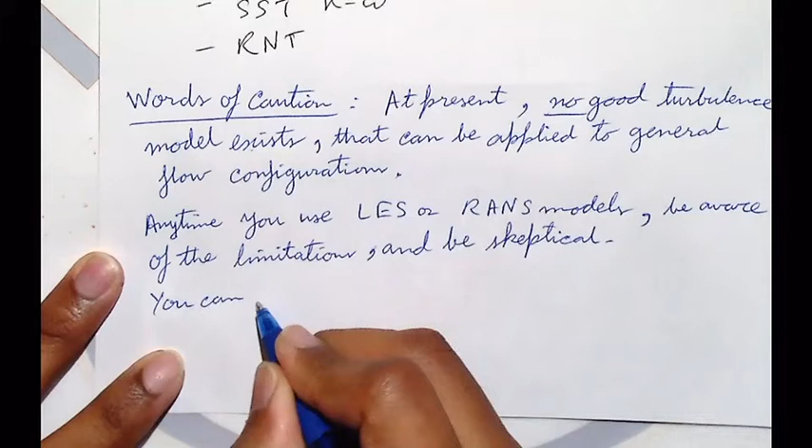And finally, you can trust DNS results, provided what? On condition, you should only trust DNS results once you know that you have resolved all length scales. You ensure that all length and time scales are resolved. That, by definition, is the meaning of DNS.

You can compare your simulations to experimental data and you'll get a very nice match, but this DNS result is inherently... that's what I'm saying, sometimes people forget to do grid convergence. So you have to do a grid convergence analysis to make sure you have resolved all lengths.

You have to do time convergence to make sure you have resolved all the time scales. You have to make sure of these things, and then you can be confident of the result. But again, you have validated your code.

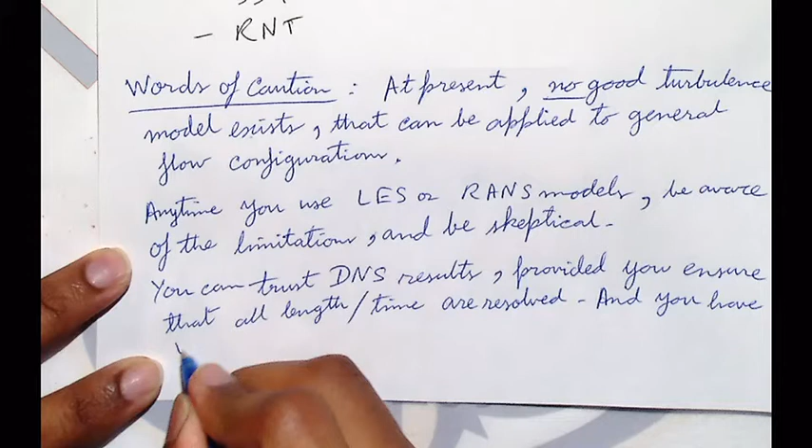Validated, verified your code—what does this mean? When you get a numerical answer from your code, the first thing you should do is try to solve a problem for which you know the analytical solution, which is what we have been doing in all the homeworks and projects. There's always an analytical solution given to you, and you're always told to compare your result to it. It's a very important part of writing any code, validation and verification.

Because a single minus sign misplaced can destroy your results. So as long as you make sure you resolve time scales, length scales, and you validate and verify your code, you can trust your DNS results. RANS and LES are still topics of very heavy research, the most active areas in fluid mechanics. And if you want to spend a lifetime on it, you can.

So any questions? We didn't talk about Reynolds stress models and RANS, and DES. So what DES does is it uses RANS close to the walls and LES far from the walls. And Reynolds stress models, what do they do?

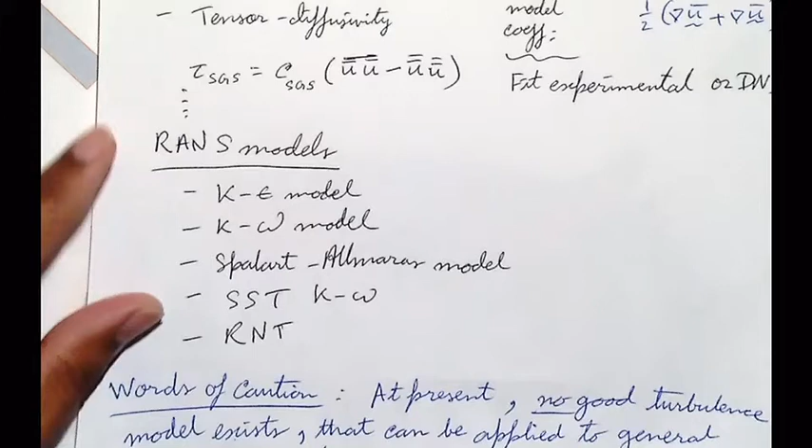They basically try to model this term. There are details which, at least for CFD, are not worth going into—you can ask me later, anybody can ask me later. I've tried to avoid spending any of my time studying RANS, because I'm a firm believer that we should not use it. But that's an opinion, that's not fact.